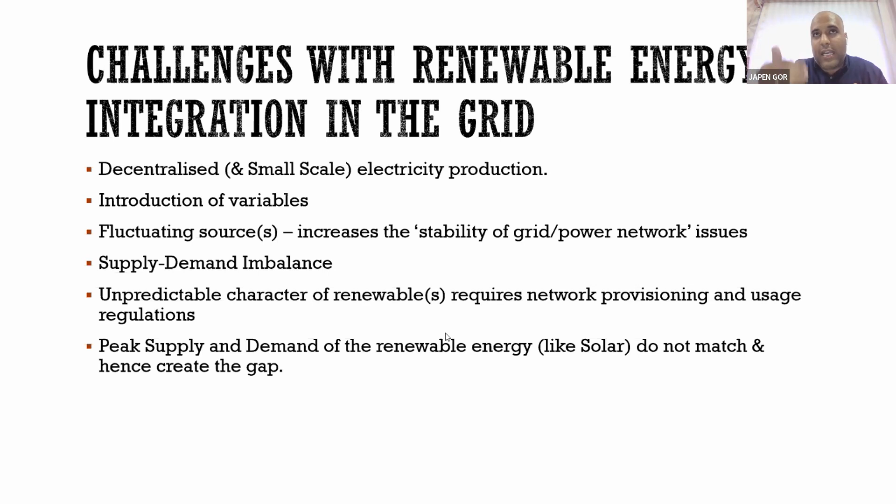So what are the reasons? We have already said that they improve the reliability of the grid. So the systems or the power consumers who are connected on this particular grid can be rest assured that electricity can be supplied 24/7 if we incorporate such energy storage systems as a backup system, basically. So to improve the reliability and resilience of the grid, energy storage systems in terms of renewable energy come into the picture. They increase the dispatchability. They reduce the environmental impact, because we are using the RE systems.

So basically, you can consider these energy storage systems as a side hero or a sidekick of any superhero. Renewable energy sources are superheroes, but almost all superheroes have their sidekicks to help them, to assist them. These energy storage systems are the sidekicks of our superhero renewable energy systems.

So if I'm supposed to classify the energy storage systems, I would classify them into four major categories: low power application, medium power application, network connection, and power quality applications. Network connection and power quality applications are the applications where the grid and the bigger picture, like the bigger requirements, come into the picture. In terms of small or medium applications like mini or micro grid systems, low power or medium power applications are the kind of energy storage systems that can be incorporated. They can be associated with the renewable energy systems in terms of supply.

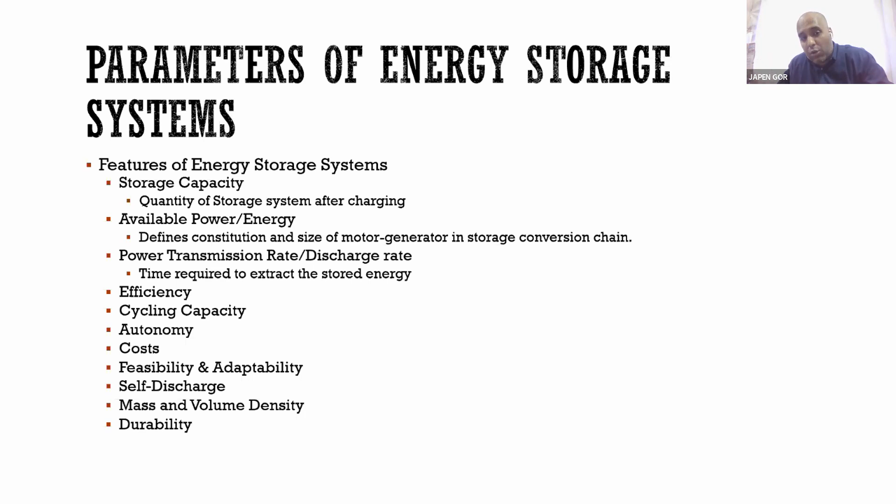So if I have to bifurcate energy storage systems into major categories, I would divide them into 5 major categories: thermal, mechanical, electrochemical, chemical, and electric. One of the most prominent and probably used for ages is electrochemical technologies, or in simpler words, batteries. This technology has been used for many years, and it has matured up to a certain level in terms of finance and technicality. Electrochemical storage technology has become more and more viable.

But there are other options available as well, such as flywheel or compressed air storage systems in terms of mechanical energy storage. We have thermal energy storage systems, phase changing material. These thermal energy storage systems are being utilized in solar thermal power plants on a very large scale. There could be molten salts, or there could be phase changing material. These molten salts or phase changing materials are a kind of energy storage system.

They capture the heat of the sun, and they are stored in an enclosed environment where the heat is captured and stored within the parameters. And as and when required, these phase changing materials or molten salts are transferred to a heat exchanger in order to extract the heat, and that heat is utilized to run the turbines. So thermal storage systems are also becoming more and more prominent in terms of energy storage systems.

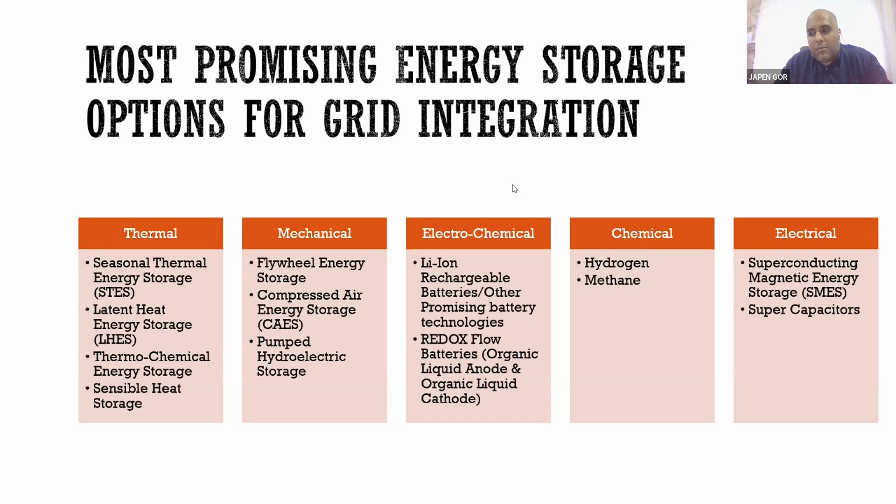However, they are more viable when we are talking about megawatt scale or utility scale power plants. So these are the major categories. As I said, I would divide them into these 5 major categories of the energy storage systems basically.

I'm going to talk about two technologies which are currently being used and which are more prominent. And then I'm going to dive into other technologies as well, which might come up, or we might see them in the near future after 10 or 15 years, which are prominent on paper, but they are still being utilized in pilot project styles.

So one technology, which is a pumped hydroelectric storage system, is kind of prominent, and it has been utilized for many years now as well. What we do in such an energy storage system is, we have two reservoirs. We make two reservoirs, one at a lower altitude and another one at an upper altitude.

And as and when the electricity is being produced during the non-peak hours, like when the electricity is being generated more than the requirement, that electricity is sent to the pump, which is located somewhere here. Let me make a pointer. It can be the pump which is located right on the top of the turbine. That pump will suck this water and it will take it to the higher altitude reservoir.

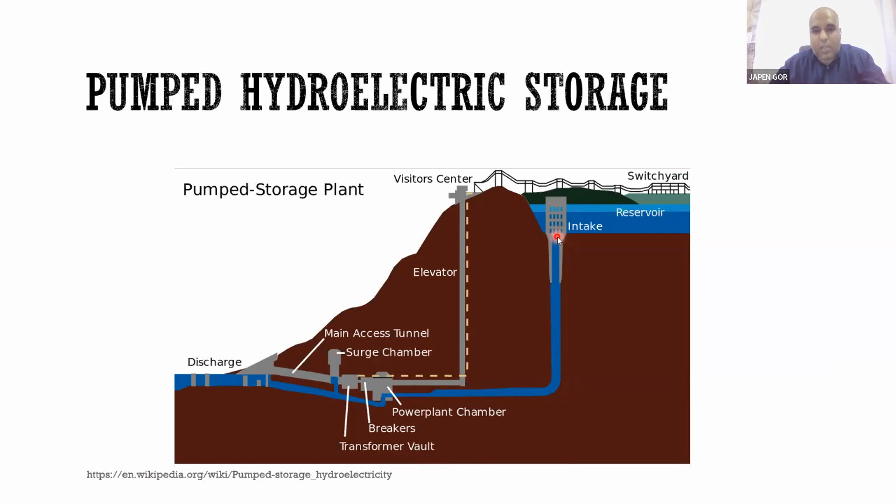Basically, there are various types of turbines used here, like Kaplan and cross flow, and all those hydroelectric concepts that we use in electricity production are applied on this system as well. So the basic principle, as I have already said, you can see here the pump and generator. This is the turbine generator. It is a Kaplan type of turbine generator, and this one is a pump which brings the water up.

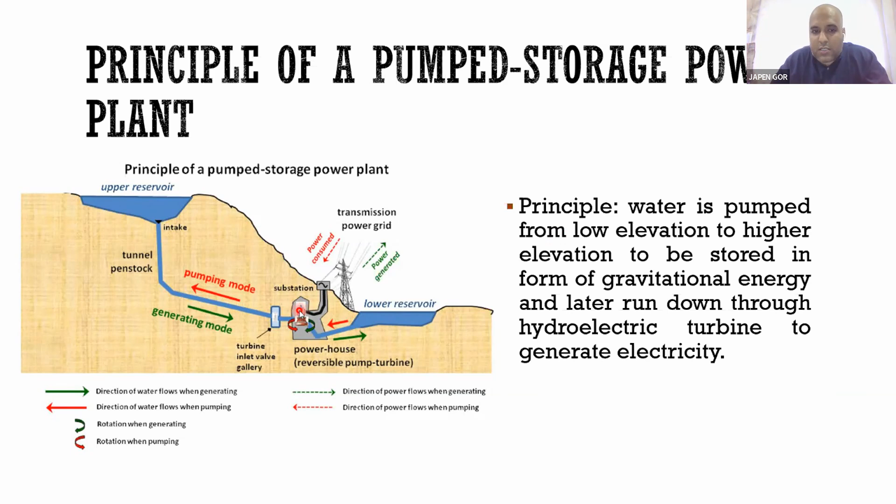So the basic principle here is we use the difference between the gravitational energy and the potential energy from the lower reservoir to the upper reservoir, and we pump the water, as I have already explained. India has already seen a good number of hydro storage facilities, and many are operational. More are towards the south side, but in the northern part of India, we have quite a few hydropower stations as well.

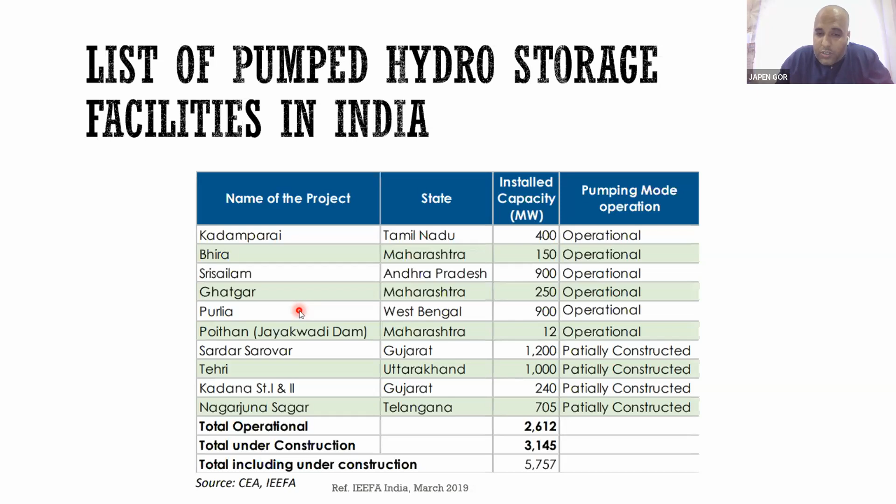So we have already installed 2.6 gigawatt of pumped hydro storage systems, and they are completely operational in India. 3.1 gigawatt of power stations are under construction, and around 9 gigawatt of these storage systems are being planned, which are under process. So this is one kind of a prominent technology. This is one kind of prominent energy storage option, basically.

Energy storage system. Power plant can be configured mainly in three different categories. Like a generator and turbine, they can be having a different pipeline, they can be set up at a different location, and motor and pump, they can be separated at another level. Such arrangement is known as quaternary set.

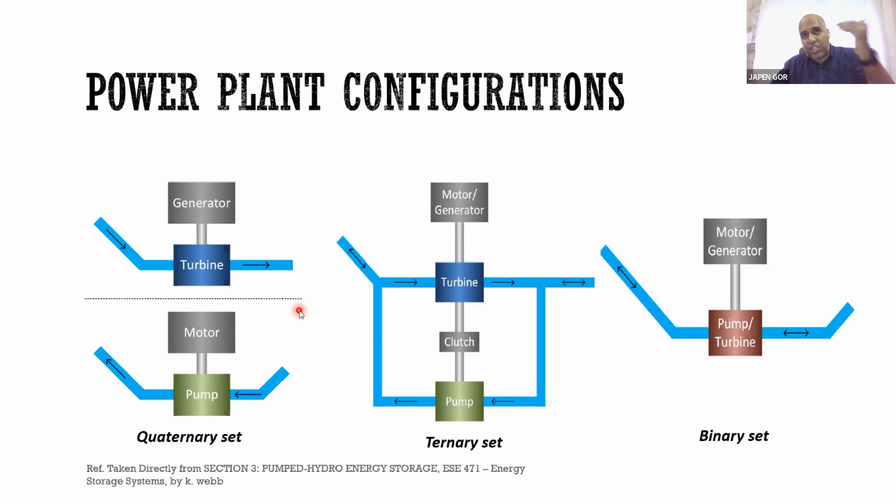If we have a motor, turbine, and pump all on a single shaft, on the same shaft, that kind of arrangement is known as a ternary set. The shaft runs in both the directions in this case particularly. If you go into the quaternary set, the shaft runs unidirectionally, in any one direction. If we are talking about the motor to pump, it would run, let's say, anti-clockwise. And when it comes to generator to turbine, it would run in a clockwise direction.

But in case of ternary set, the shaft onto which the motor, turbine, and pump, all three important components, are installed would run in both the directions, clockwise and anti-clockwise, as and when the flow of the water is required. Another configuration can be a binary set, where motor and generator can be installed at one point, and pump and turbine can be installed on the other point.

So if you look at the configurations in more detail, you will see that in binary set there is a single pipeline utilized, a pipeline which is taking water from upper reservoir to lower reservoir. At the same time, the same pipeline is used to take water from lower reservoir to upper reservoir. So in many of the aspects, the cost of the construction can be lowered down. So in most of the cases, binary sets are cheaper. However, they are expensive in terms of operation and maintenance.

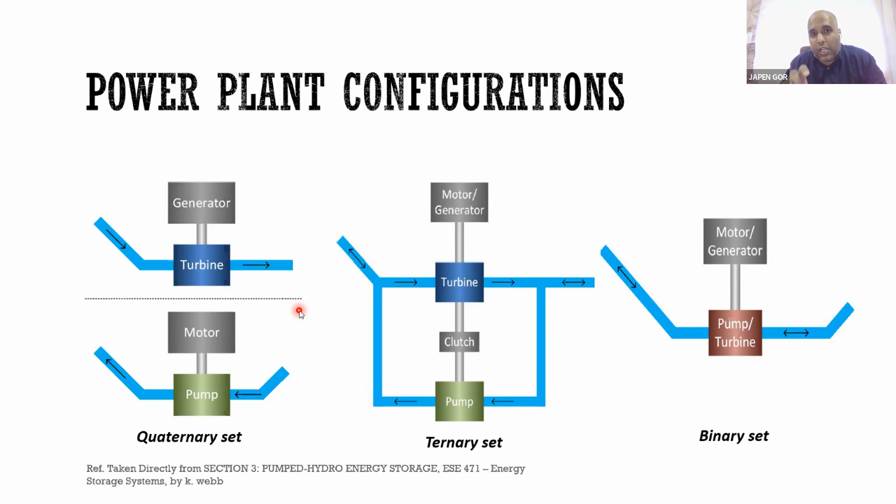Whereas in ternary and quaternary, you can see that different types of pipelines and different configurations of the piping are being done, where a single pipe is not utilized for both the operations, for taking water down to up or up to down. They have different operations. They have their own dedicated purpose. A single pipeline is utilized for a single purpose. So this is one of the most prominent energy storage systems that we have seen so far, hydropower plants.

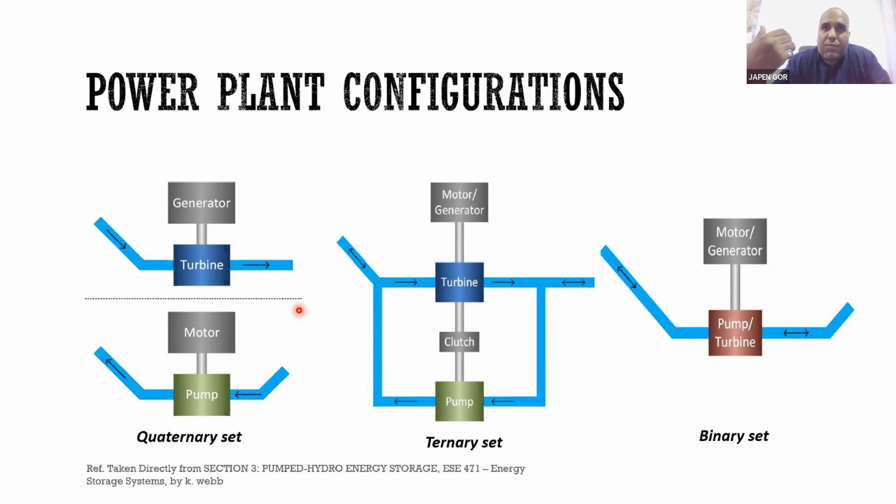However, these hydropower plants or pumped hydro energy storage systems, they are expensive. They require a very large area, because we need to store a higher quantity of water at both the places, at the lower reservoir and at the higher reservoir as well. So we need to have an enclosing environment where we have to keep all this water stored. So we might need to create dams, or we might need to have certain reservoirs which have a particular boundary.

So they are the disadvantages, or the challenges rather, associated with these pumped hydro systems, where the cost of operation and maintenance and cost of building such a system is very high. So kind of expensive. That is one disadvantage. Another is they do not kick in very soon. Like they require certain time to start up.

So when the electricity is being surged, or it is not being properly injected into the grid, they might not kick in instantaneously. We need to give certain time to start up the system. So there could be some lag, 15-20 minutes of a lag, before the electricity is being injected into the grid.

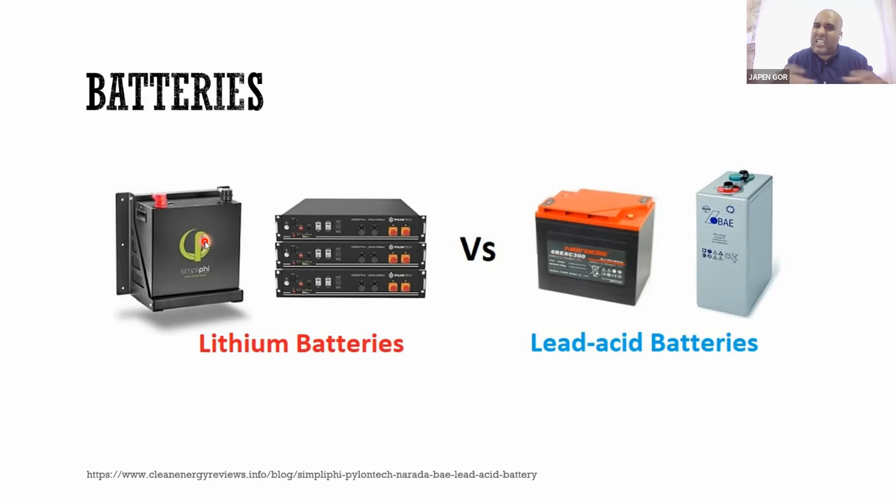So there are two major types of cells which are used in batteries, and series and parallel connection of these cells is basically known as battery, right? So a battery is constructed when you connect a number of cells in series or parallel, mostly in series, to increase the voltages basically. So that is the battery.

Now, as I have already said, chemical energy into electrical and electrical energy into chemical, these batteries have been prominent for more than 3, 4, 5 decades. Basically, they have been using this technology for a very long period of time, and this is one of the most used energy storage systems, even in thermal power plants or any other renewable energy storage systems where the electricity is supposed to be stored for a certain period of time.

I'm sure you guys might have seen certain battery banks or battery backups in thermal power stations as well, to provide backup to run auxiliary powers of the power plant, or even to support the grid. We have used such batteries in our households as well, in terms of UPSs, uninterrupted power supplies, or inverters basically. So batteries are one of the most prominent technologies, used for a long period of time.

These systems could have higher energy density, but in most of the cases they have lesser power density. And when I'm saying higher energy density and lesser power density, it basically means these systems are able to provide electricity for a longer period of time, 1 hour, 2 hours, 3 hours, just like hydropower plants. But they are bulky, and that's why they have a lesser power density.

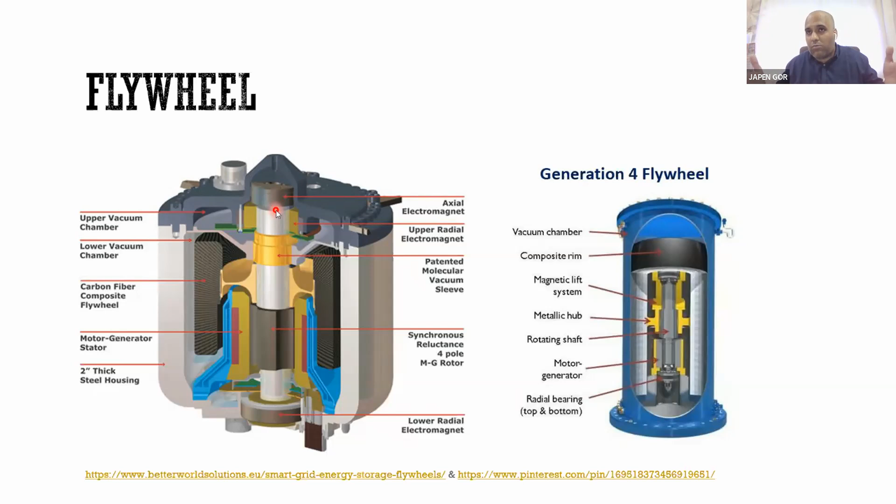So in other terms, we can say that flywheels have lesser energy density because they do not provide electricity for a longer period of time, 60 seconds, 90 seconds. It is not in terms of higher duration. And as we go on building bigger flywheels, obviously the cost will increase. At a certain point, it becomes illogical to make a bigger flywheel for more energy over a longer period of time, because the entire energy storage system becomes very expensive, and it does not make sense to go for very bulky or very large flywheels.

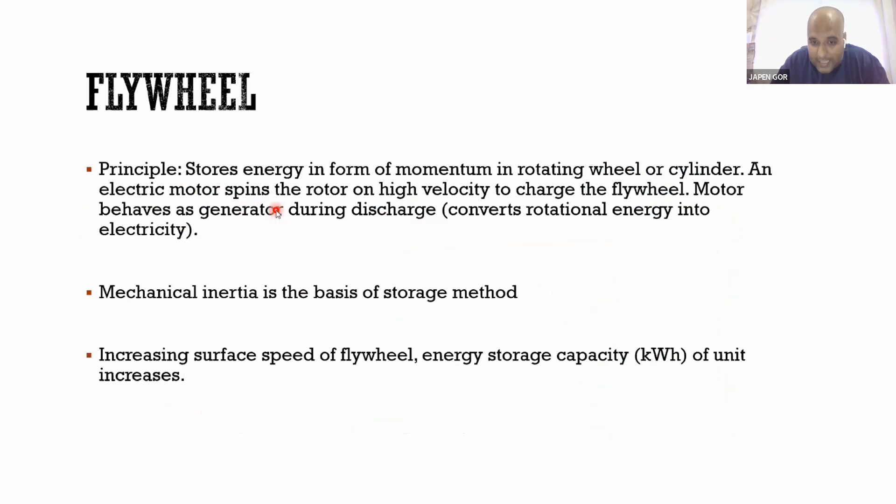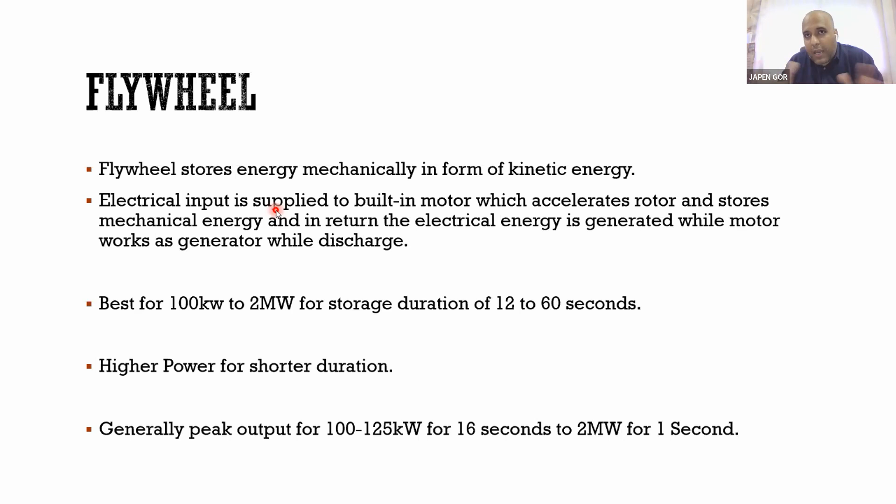So this is the principle: the momentum or kinetic energy stored in the shaft, mechanical inertia, is utilized to run the entire system. As I have said, it can run from 100 kilowatt to 2 megawatt for a couple of seconds, like 2 to 5 to 10 seconds to 60 seconds. It provides electricity for a very short period of time. For a 100 to 125 kilowatt power plant, it might give electricity up to 16 seconds. For 2 megawatts, it might be 1 to 5 seconds. It's not bigger than that.

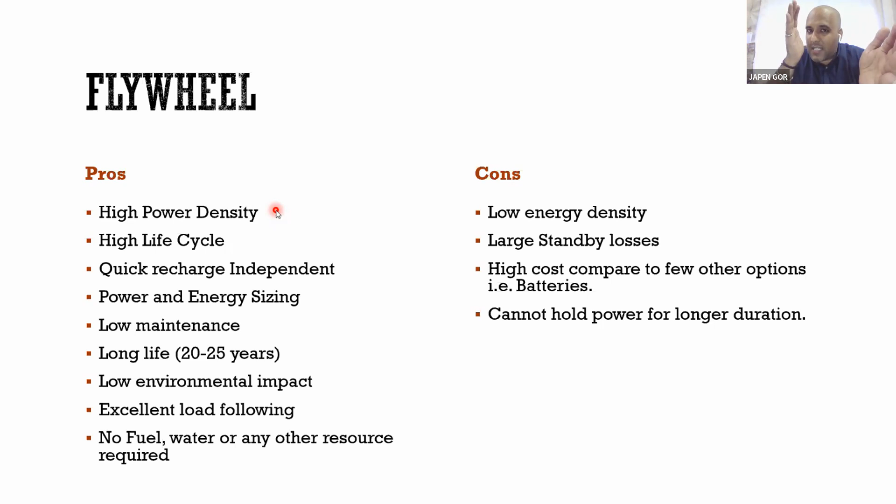So as I already said, what is the disadvantage? The disadvantage is it has very low energy density, but it has a high power density. So it can store more power, but not for a longer period of time. That is the difference between power density and energy density: it can store a good amount of power, like up to 2 megawatt.

That is a good amount of power, right? 2 megawatt can be stored as power, but not for a very long period of time. So the energy density is not higher, power density is good. So it might work in certain power stations where you require electricity as a backup for a very small period of time, basically.

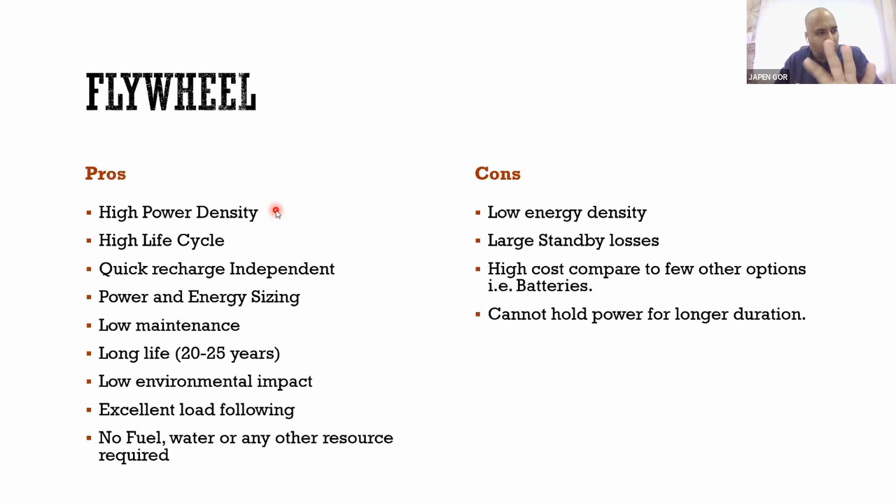So that is low energy density. It has a very long life. My mistake, sorry, it has a very long life. That is one advantage of such a system: once you construct it, it will run for 20, 25, 30 years. So it's unlike a battery. You don't have to change the entire system every 5 to 6 years, right? So it's not a recurring cost other than the operational and maintenance cost. There is certain maintenance cost associated with any system anyway, right?

So of course, it has very low environmental impact. That is one of the best positive sides of the system, because since this system is mechanical, there are no hazardous chemicals utilized in flywheels, unlike batteries. In batteries you have lead, certain acids, let's say cadmium. These components are hazardous to the environment when you discard the battery, right? So in terms of flywheel, there are no bigger environmental hazards.

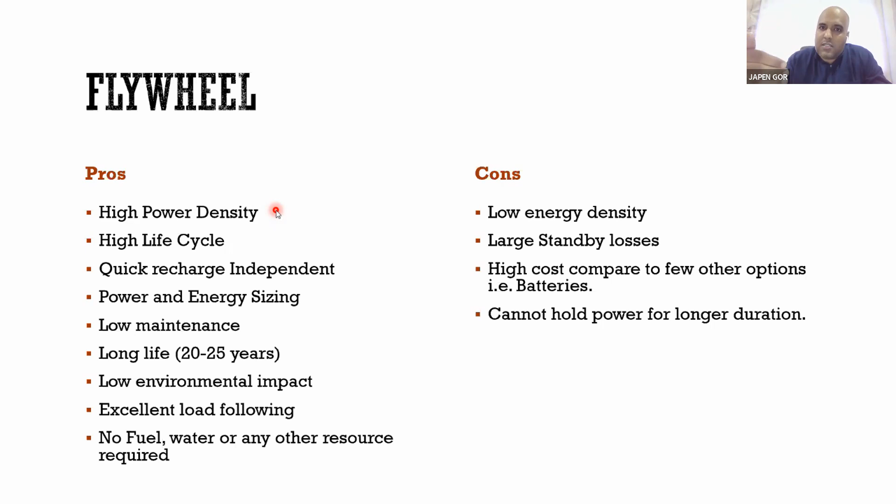There are certain pros. At the same time, there are certain cons or challenges associated with the flywheel. As I say, this system is still being utilized on a pilot basis. Another prominent technology which we might see in the very near future is electrochemical capacitors, supercapacitors, ultracapacitors. I'm sure you might have heard about ultracapacitors, supercapacitors, one of the most prominent technologies, and we might see this technology in automobiles very soon, probably within 5 years, replacing the batteries in terms of energy supply and storage.

So what is the basic principle behind electrochemical capacitors? Just like a normal capacitor, which stores charges, like a battery stores energy. The capacitor stores positive charge and negative charge. There are two different plates which have a chemical known as electrolyte sandwiched between them, and this electrochemical system is broken down into positive ions and negative ions. Positive ions are deposited on one side of a plate, and negative ions on the other side. This is the basic concept of the capacitor, right?

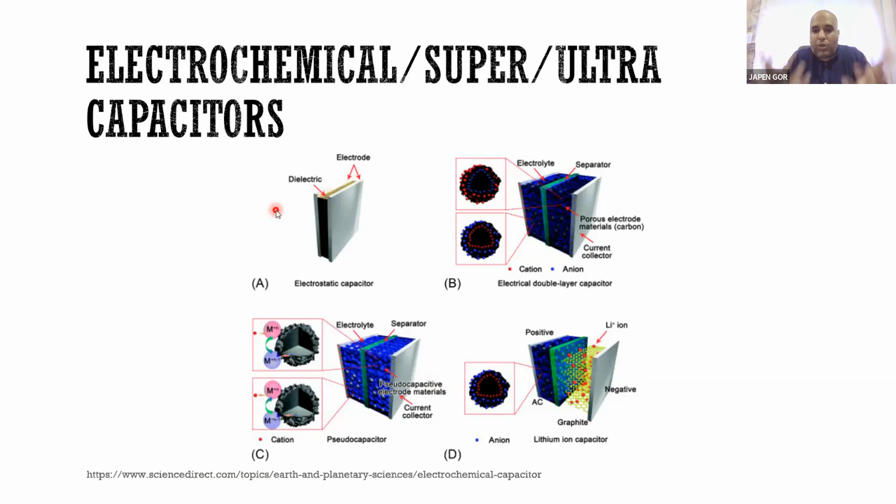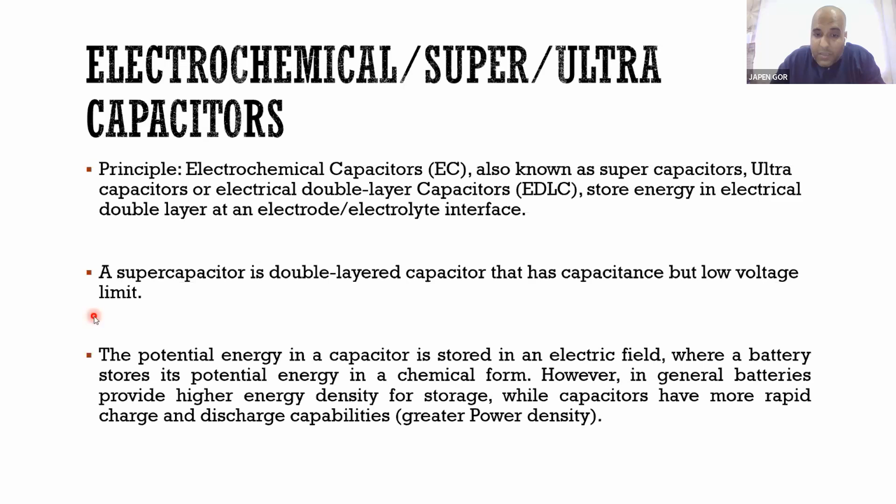What is different in supercapacitors is the gap between these two plates is very small. That is reduced, and the number of plates is increased, so the barrier between the plates is reduced. When you reduce the barrier, you are reducing the resistance of the entire system, so the flow of charge becomes easy, and you get more capacitance. A supercapacitor is a double layer capacitor that has low voltage limits. An electric field is created on both the positive and negative plates. These plates store the charges, and as and when required, these charges are combined and electricity is produced.

Capacitors use static electricity rather than the chemistry that stores electricity in a battery. Positive and negative ions are stored on the two sides, the plates. A supercapacitor differs from ordinary capacitors in two ways: its plates effectively have a much bigger area, and the distance between the plates is very small. The separator between them works differently than conventional dielectric systems. So supercapacitors, with higher surface area and shorter distance, have a higher capacity to release charges.

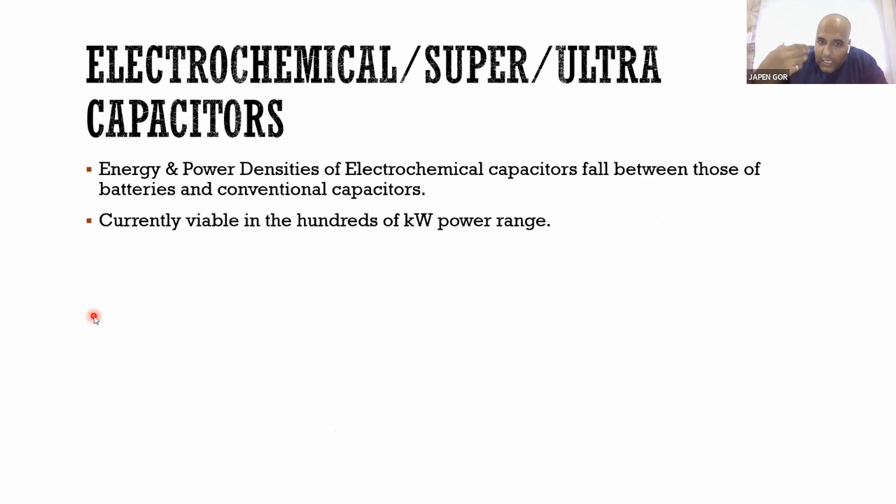Supercapacitors will store electricity for a longer period of time, so we can increase the energy density. But at this point, compared to the battery, they have lesser energy density, and the research on supercapacitors aims to increase the energy density. They have higher power density, longer life, but lesser energy density. They are expensive at this point of time. But if I have to bet on an upcoming energy storage system, I will bet on supercapacitors becoming one of the most prominent energy storage systems in the very near future, and probably a replacement of batteries as well. This is my personal point of view.

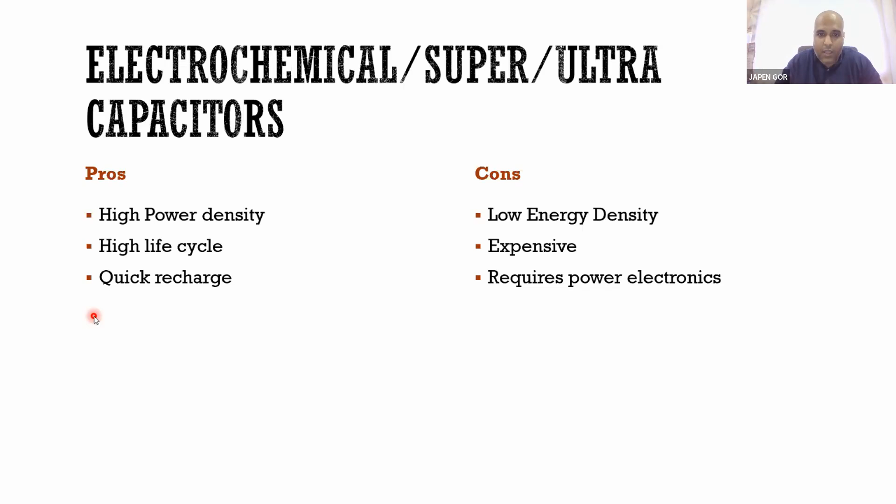Another prominent technology is superconducting magnetic energy storage, also known as SMES for short. As a principle, we have a superconducting coil, made of superconducting material. The principle of a superconducting material is that below a certain temperature it has zero resistance in theory. When we decrease the temperature of this material, the resistance within the material reduces. After a certain point, it is theoretically zero resistance.

Now, how this behaves as an energy storage system: you see this conventional power plant, where electricity is produced by motor, pump, compressors and all. That electricity is injected into the superconducting coil and stored there for a certain period of time. Because there is zero resistance in theory, that electricity is not going anywhere. It is stored within the superconducting coil itself in terms of magnetic induction, right?

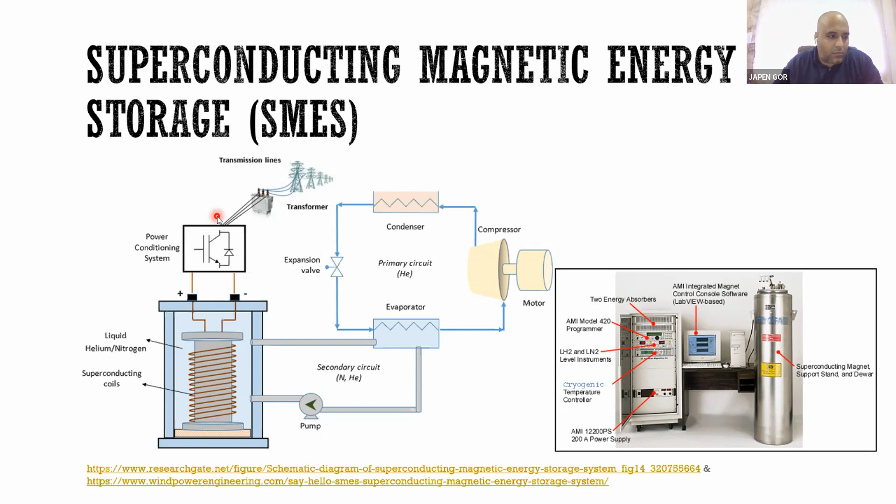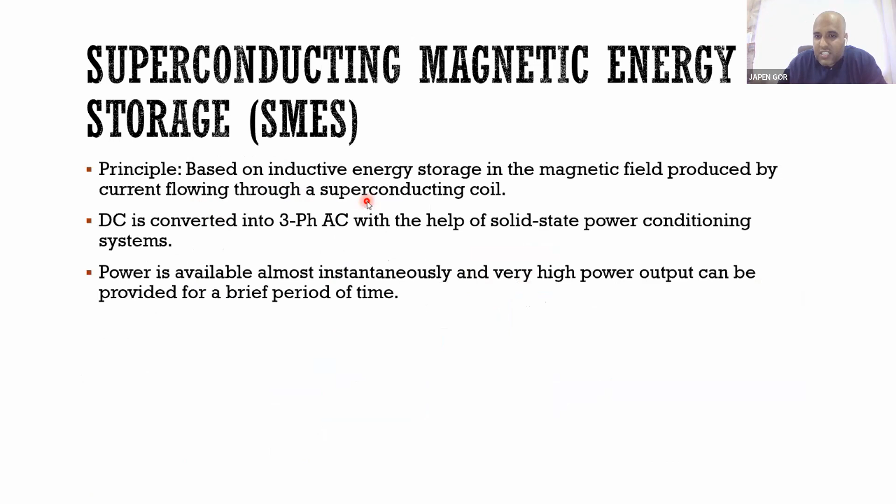Prominent technology, but very expensive at this point of time. Energy is stored inductively in the magnetic field of the superconducting coil, and the DC electricity is converted into three-phase AC electricity and given to the grid. Possibly a good energy storage system, but this type of technology might not come into actual economical application in the near future. It has a higher power density but lower energy density. It cannot provide electricity for a very long period of time, like hydropower or batteries.

Very expensive, costly. I'm going to talk about the last energy storage system, which is very simple to construct, but difficult to maintain at a certain level. We create certain voids underground, we inject open air into them, and we store that air in those reservoirs we have made underground.

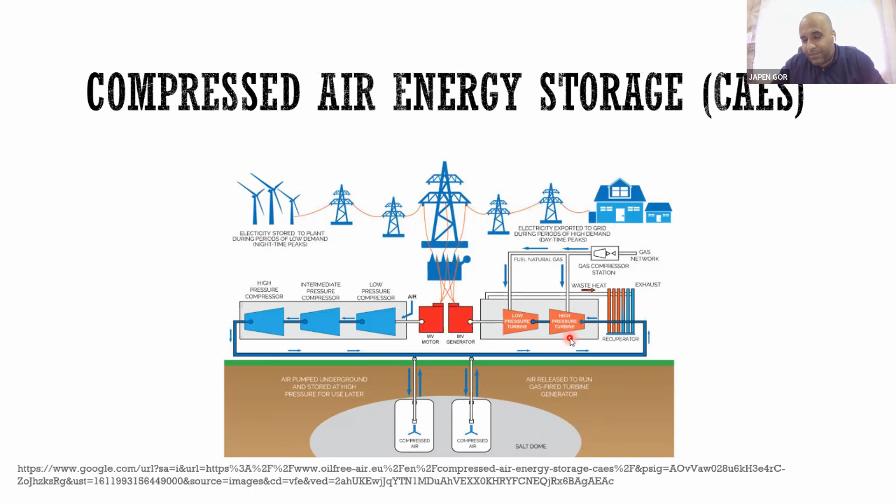It is kind of simple on paper, but it requires a very large area. It is very expensive to construct, and we might see that in the near future. I'm not sure, I cannot bet on any of this, but the best part of this energy storage system is it has both high power density and high energy density. So other than the costing part, this is technically a prominent technology, basically.

So these are certain types of energy storage systems that I wanted to talk about, two of them being used on a regular basis and four of the other technologies which we might see in the near future. I open the forum for the discussion or the question answer session if you have any.

I might have gone through these technologies. I am Dr. Damija from Skill Council. Yes, ma'am. A very nice and a very detailed presentation. I'm really impressed. The way you have covered the entire energy storage systems in one presentation, I would like to compliment you. There are one or two questions I want.

I want to know more about batteries. I had done a report on batteries, so we had seen that lithium ion is the future and metal hydride is the medium term. So is there anything which has been done on metal hydride batteries, or have we lost the race because there were so many issues in terms of the weight penalty, in terms of the efficiency?